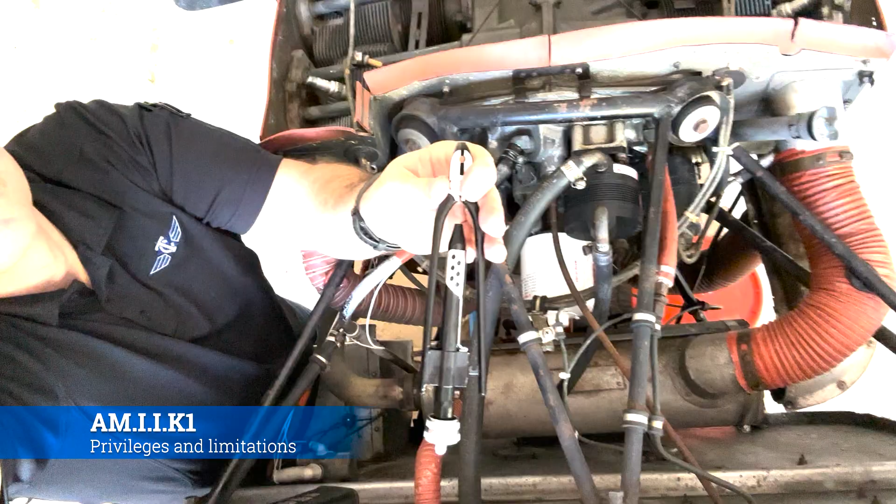Okay, Part 65 covers the certification of airmen to include mechanics. Now, an airframe and power plant breaks down into three actual certifications. One is your general, which allows you to grow into an airframe mechanic or a power plant mechanic, or in our case, an airframe and power plant mechanic.

Now, there's two ways that you can do that. You can do it through practical experience, but it takes several months and it's a long period of time, or you can go to a school like this one, and then you can graduate inside of about a year or so, if you successfully pass the oral and practical and the written test for each one of those: general, airframe, power plant.

Okay, so now if you just have your general, what are you able to do? You're not permitted to perform any sort of major repairs or major alterations to propellers or anything else like that. There's very few that actually have just their general, but most of these guys work at repair stations.

But the thing is, you can go work at a repair station, and so long as you're operating under their certificate, you can get your repairman certificate and just work. There's not a lot of money in doing that, but it is a way to gain experience if you didn't have your A&P.

Okay, so what about airframe and power plant? So once you have your airframe, you're authorized to perform 100-hour inspections and servicing on airframes. That means anything that's attached to that airplane minus the engine. Once you have your power plant, then you can do the 100-hour on the engine.

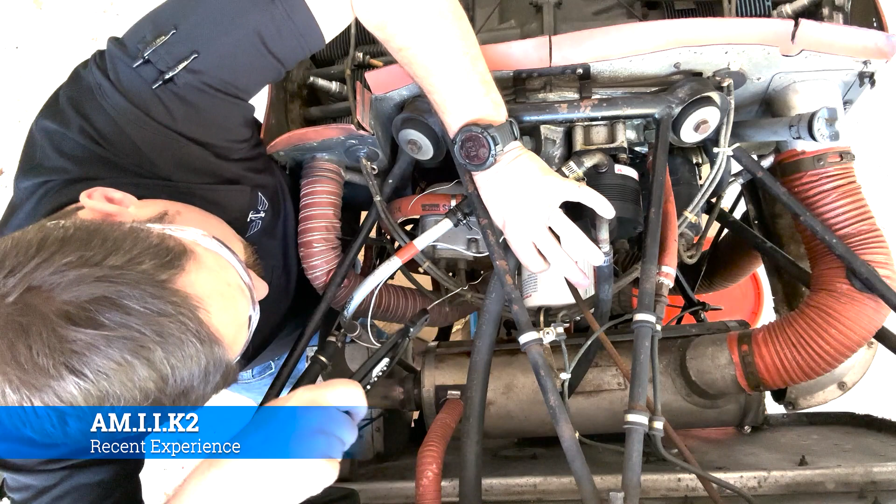Okay, so Part 65 states that the mechanic, before exercising their privileges, has to work for at least 6 months of the preceding 24 months in one of three capacities. One, they served as a mechanic; technically supervised other mechanics; or served in an executive capacity over the maintenance and alteration of aircraft.

So basically, you've got to be a mechanic, a team lead, or a manager of some variety in order to exercise the privileges of your certificate. Now, you'll never lose that certificate. You just won't be able to sign anything off for 6 months if you start and stop all over again.

Now, on that, if you were to lose your recency, there's a dozen different ways that you can get back again. You just have to do one of those ways for 6 months to regain that recent experience.

This could be just going to work at a repair station, getting another job as a mechanic and then not signing anything off, volunteering, any number of things where someone will just vouch that, hey, look, for 6 months you've been doing X, Y, or Z as a mechanic. Once you're there, then you can turn around and sign things off again.

So now, as a mechanic, you're going to be using a lot of technical data to do your job.

Now, that's going to come from a variety of different places, but one of them is going to be the manufacturer through their maintenance manuals, or their wiring diagrams, or their parts catalog, or any number of other types of data that they will produce and give to you. Let's talk about all those different types of manuals and what they mean.

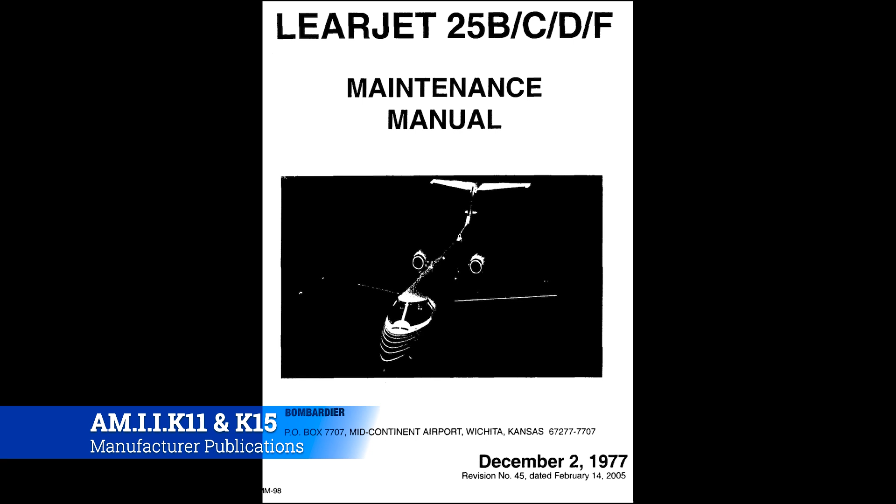You would get into the CMM and you would start troubleshooting and repair or replace that individual item. You could have an overhaul manual for your power plant. If you're a helicopter transmission dude, you could be doing that. You could also work in a place that specializes in overhauls, and you will use the overhaul manual almost exclusively because you'll never see the aircraft. You'll simply get a box, and inside the box is an engine.

Another one, we'll talk about the structural repair manual. That contains manufacturer information on specific instructions for repairing primary and secondary structures. So, doing massive rework on the airplane structure itself. Or an IPC, an illustrated parts catalog. That's something that we're going to use on a regular basis to get part numbers and check the effectivity of parts, so on and so forth.

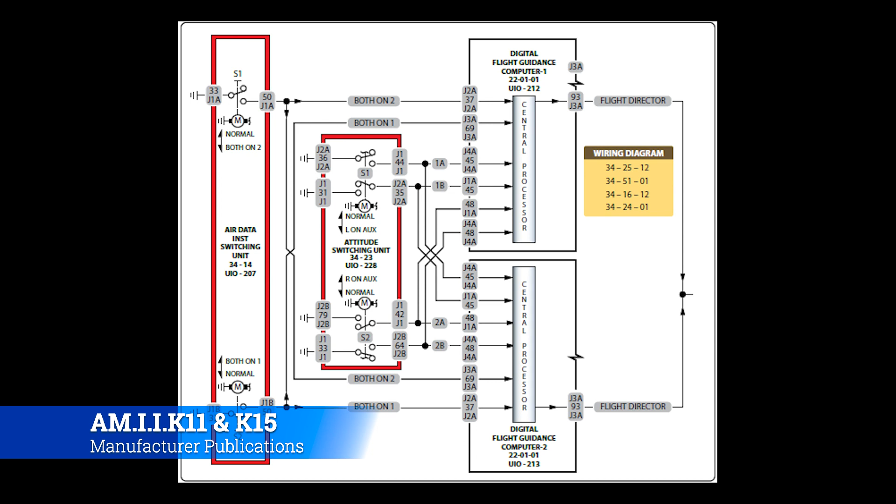The wiring diagram manual. When I was in the Army, they called these fold-outs because they were so big. You would open up this actual paper book. It was the one that we didn't have a PDF of, so we just had an old paper fold-out. We would open up the book and literally fold out these massive sheets, and then use those for troubleshooting any sort of electrical fault. So that's your basic aircraft maintenance manuals that you need to know about.

A special manufacturer publication that will come out, especially if you are into private jets, are service bulletins. Service bulletins, sometimes called service instructions, are several different types of publications issued by either airframe, engine, or component manufacturers. These service bulletins will come out and say, hey, we need you guys to do X, Y, or Z because we found a safety condition, or some sort of non-conformity, or we found that this guy in the factory was asleep on the job, and we produced a bunch of parts that shouldn't have been produced, so we need you to change these things out. Now, all these service bulletins will have estimated man hours to remove and replace these components.

So if you're a private jet guy, you're going to have owners and pilots. They'll say, well, how much is this going to cost me? How long is the jet going to be down? And these service bulletins give you an idea of how to have that conversation. You can say, well, this says it takes 10 hours, so it's going to cost you $3,000 or whatever it's going to be, and it's also going to be out for a day or whatever. But that is a service bulletin.

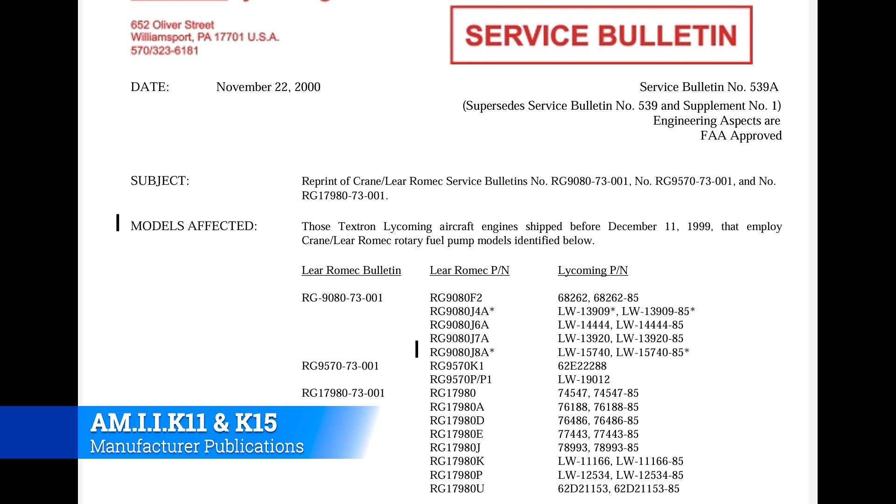So, kind of related to the service bulletin, but not coming from the manufacturer itself, is the FAA's aviation maintenance alerts. They provide a common communication channel through which the aviation community can economically interchange service experience and cooperate to improve aeronautical product durability, reliability, and safety. Essentially, it's a fancy way to say, hey, look, I found this on my plane. I'm going to let the FAA know, and the FAA lets everybody else know.

It's not quite to the level of an airworthiness directive because it's not a common thing that we see on a regular basis to the point we need to do a massive change. It's just kind of a heads up to be looking for these types of things.

If you say, hey, look, I found this piece was melted on my airplane, you could simply let the FAA know. They put it in the bulletin, they push it out, and then everyone else knows that whenever we're doing work on that type of airplane, we need to look at that piece to see if it's melted. Maybe there's a trend here. Maybe it's just a one-off of that one guy, but it doesn't hurt to simply be talking to one another.

The last bit on this section is the minimum equipment list, or the MEL. You'll hear a lot of Part 121 guys or heavy commercial guys say, "Well, we just MEL'd it, or we deferred it." What they're referring to is that in order for the airplane to be legal to fly, there is a minimum equipment list, and that's what MEL stands for. As long as the airplane has what's on its minimum equipment list, then it's good to fly. You can defer whatever fault is showing up for heavier maintenance later on down the road.

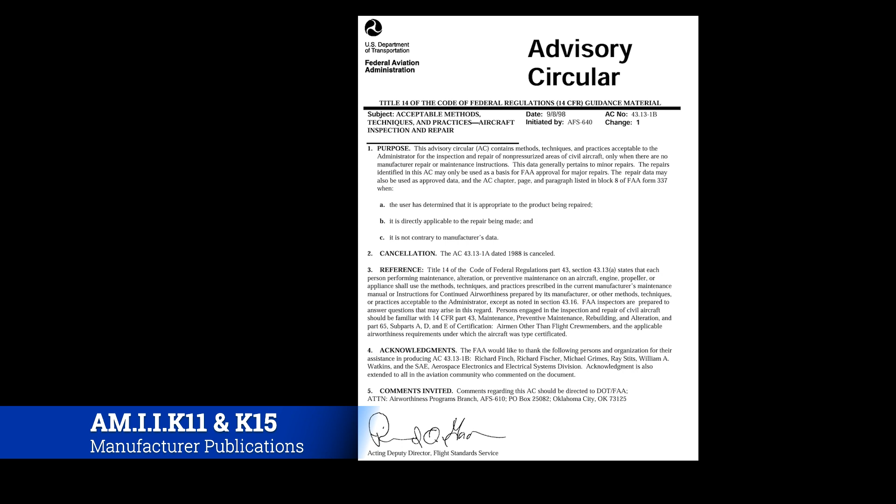But just know AC-43, and there are some others, but the main thing that you need to take away is what is approved and what is acceptable to the administrator. You can't just be doing the shade tree mechanic thing and beating to the tune of your own drum. You have to work to some sort of documentation, some sort of plan for it to be legal and professional aircraft work.

Now, in those maintenance manuals and the service bulletins and that documentation we were talking about, there are all kinds of fairly standard cautions, warnings, and notes, and every single one of them means something. So let's talk about all those standardized blocks that you'll find in a maintenance manual, a service bulletin, or a maintenance alert, and what they mean. We're going to look at notes, cautions, and warnings.

But first, I want you to see this page. Notice that this is some really basic stuff. It's how to use the maintenance manual, what the notes, cautions, and warnings are, and serialization. Notice in the bottom right-hand corner, this is page 2. Almost every maintenance manual you ever work on will have these introductory pages up front, front matter. If you're new to the plane or new to that manual, it is very good to start by brushing up on the differences inside of this manual.

If you go back to our human factors class, we talked about the SHELL model. One of the things the SHELL model looks for is confusion in the maintenance manuals and maintenance practices. Is there some kind of weird, quote, software issue where they made the maintenance manual so confusing that people just can't follow it? So it's always good to review this.

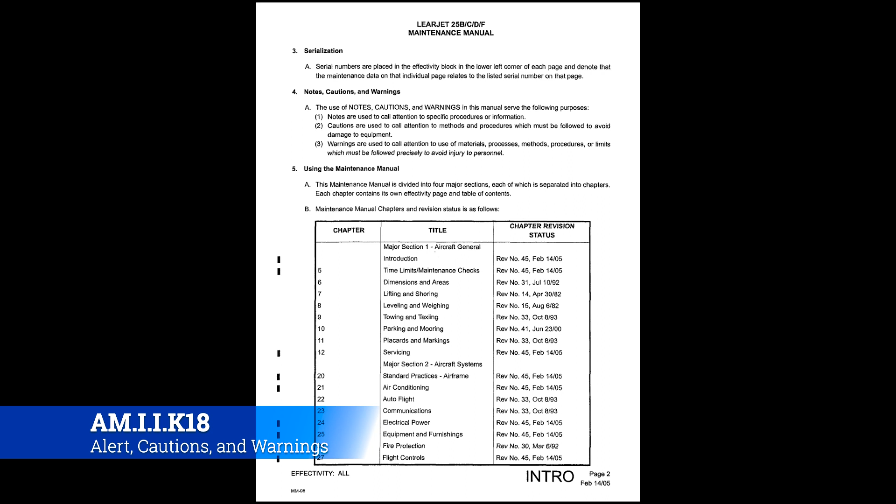Now, this is the Lear 25's manual that we're going to be using throughout the duration of this course. It's going to be our trainer. But anywhere you go, one of the first things you should do, and it should be part of their program as you come on, they'll say, hey, look, these are the differences in our manuals. Now, notes, cautions, and warnings are fairly standard. They don't change that much, but they could. So let's go over what notes, cautions, and warnings are per the Lear manual, and then we'll go on from there.

So first off, notes. Notes are used to call attention to specific procedures or information. Most of the time, whenever you see a note in a maintenance manual, it's because there's something that may not be painfully obvious to the person working on it or reading through the manual. For instance, note, make sure the grease gets into this place, or make sure you have this circuit breaker pulled, or make sure nobody else is working on these things because this system will talk to that system and mess things up, or you might get a false reading, or your inspection will be invalid.

The notes are really good to pay attention to before you actually get working, which is a good practice, and we're going to hammer this into you. Sit down and read through all of the tasks first, and once you have a good idea of what's going on, there won't be any surprises. Or a note might say, hey, if you've done steps 1, 2, and 3, don't worry about steps 4, 5, and 6, just go straight to 7. Otherwise you work through 1 through 6, get to 7, and realize you didn't have to do that work, because that happens.

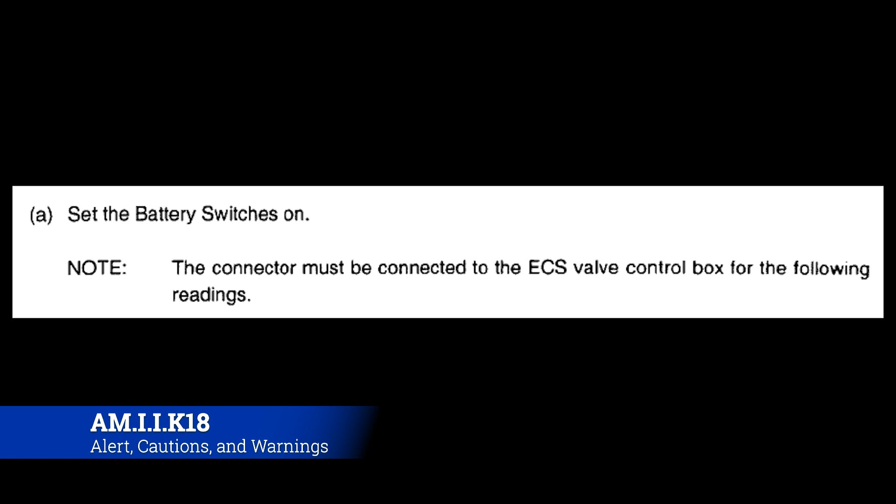So that is a note. Now, cautions are used to call attention to methods and procedures which must be followed to avoid damage to equipment. So this is pretty standard. Caution for the airplane, warnings for people. So essentially what a caution is doing is saying, hey, look, don't swing the gear if you have X, Y, or Z locked out or whatever.

A good example of this, even though this may be a warning, I don't know how it reads in the AMM for a 787, but essentially there is a way to close the nose gear up on the 787 whenever it's down if there's not a certain pin in. And so you could have a caution that says, hey, look, don't do these things, or don't put it in air mode if you don't have this pin in, because these things could happen. The nose gear could close up and you go slam right down onto the floor.

That actually happened whenever I was at ATS. I was up at Everett. This happened out at Moses Lake. But essentially, a guy got on, went to do some avionics troubleshooting. He put the plane in air mode. They didn't have the pin in. Down the plane went. If I'm remembering that correctly, it was several years ago. But essentially, that could be an example of a caution. Hey, look, if you do these things, you could damage the airplane.

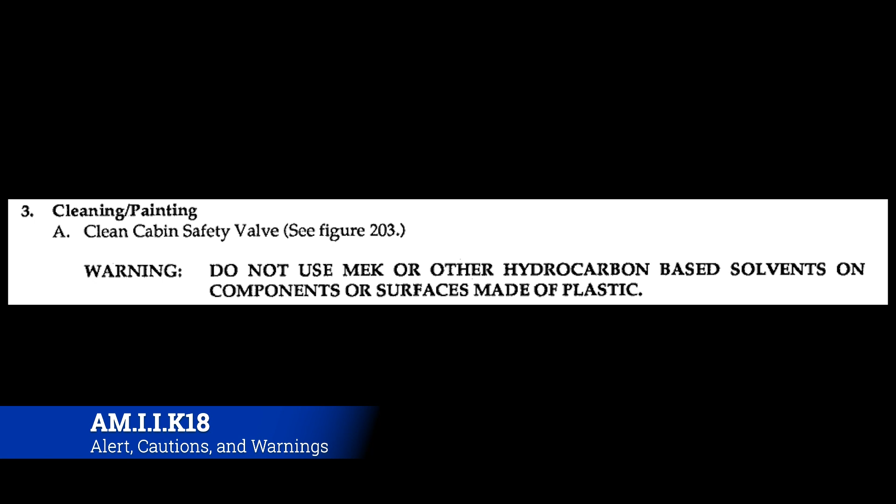There's also times where you could get seriously hurt like, don't energize this circuit if you're doing X, Y, or Z, because it's going to cause electricity to flow in a way that's going to get you shocked. There's all kinds of these warnings in there, and these are the ones that you need to really pay attention to, because you only have one life, you only have two eyes, and you only have 10 fingers. That means you have a limited amount of mistakes that you can make, depending on the severity of that mistake. And you need to make sure that you're not doing something that's going to eat up one of your 9 lives. So those are notes, cautions, and warnings.

Now, in the past, we've talked about effectivity and how different parts will have different effectivity codes that correspond with the airplane serial numbers. In some situations, there will be an actual effectivity code, and this is effective for line number point A to point B, or whatever it is. Let's get a little bit more familiar with effectivity and how it applies to our parts catalog. Okay, so we talked about effectivity codes a little bit earlier in other videos, but let's give it an overview and we'll dive into them again.

So as aircraft are produced, different parts will get used. Sometimes this is a design change, sometimes it's a supplier change. If you build an engine that says, hey, look, this is where all of our exciter boxes are going to come from, like Brandon Sanders exciterbox.com, and then all of a sudden the world realizes that I don't know how to build exciter boxes, and they fire me, and I go bankrupt. Well, if you still want to deliver jets, you're going to find a new exciter box place. So you go to actualexciterbox.com and you start ordering from them.

Well, let's say there's an issue with your engine and you have one of the Brandon Sanders era exciter boxes. Then it's going to say, hey, look, this part number isn't good anymore. You need a new part number from the actual exciter box company. And so that means that my part is only going to be effective on certain serial numbers of the jet, and then whenever it goes out, it needs to get superseded by the new exciter box number.

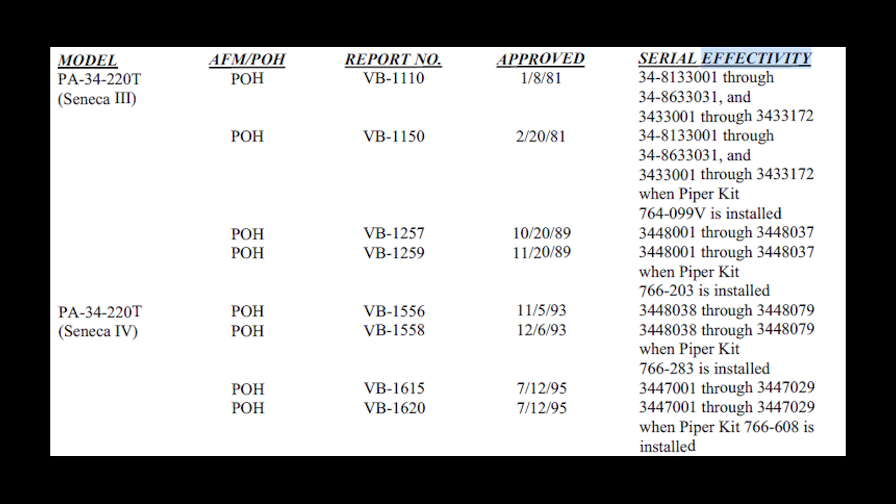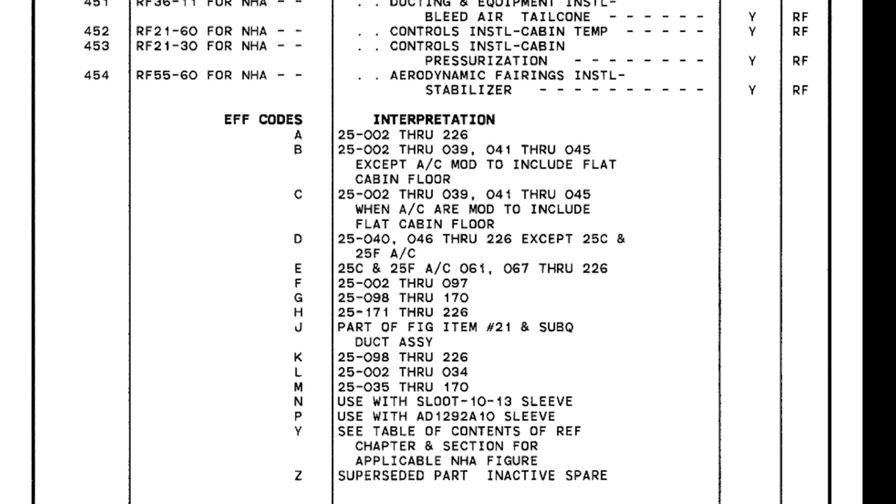Okay, so here's our service bulletin again. Notice that it looks very, very different, but also notice that effectivity doesn't go just for parts. It can go for a lot of things. In this case, it's technical data. So this technical data, this service bulletin, is effective for those part numbers or those serial numbers that you see listed there on the bottom of the page.

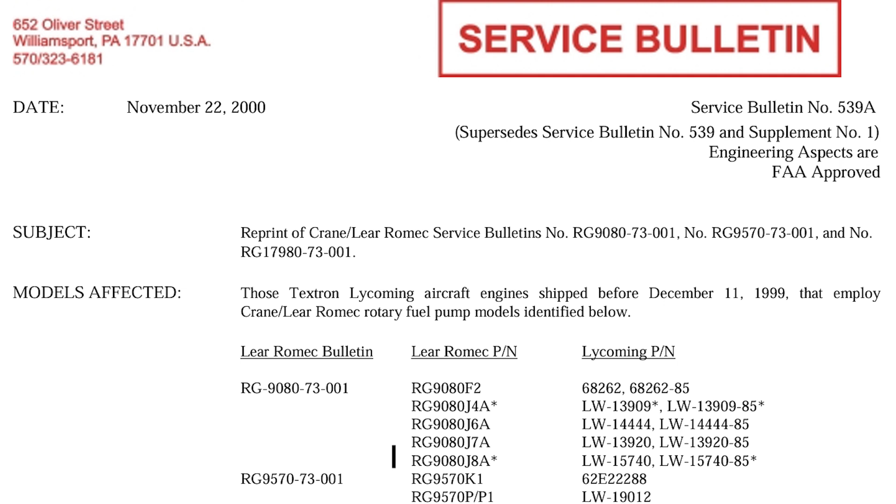The principle is still the same. It's still like this data, just like the part in the IPC that we just looked at. This data is used for these serial numbers, and so if you're using this service bulletin on a serial number that doesn't fall within those ranges, well then you're doing maintenance not by the book, and you shouldn't be doing it. But the big takeaway here is to know that effectivity goes far beyond just parts. It also goes into a wide array of things. It's a system that gets used throughout aviation.

Okay, here's another example of effectivity being used outside of a parts manual. This is the front matter that we just looked at on cautions, notes, and warnings. Notice on the bottom left hand side how it says effectivity colon all. It means that this is how Lear as a company does their maintenance manuals. Cautions always mean this, warnings always mean that, notes mean this, and so it's effective on all the Lear 25s that they produce. And I'd be willing to bet that it means that for all of the aircraft they've ever produced. But yeah, so that is effectivity.

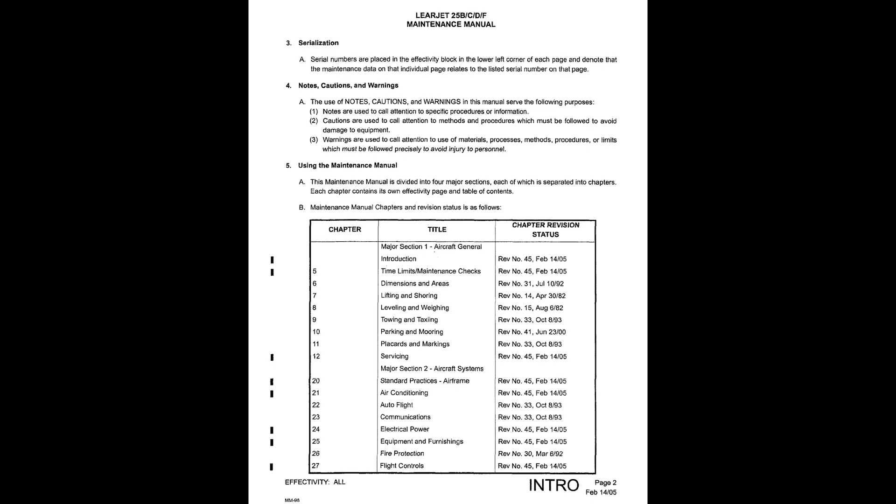Let's talk about maintenance programs and what the manufacturer requirements are for different airplanes and different maintenance programs, and how that applies to our job and how we maintain our compliance with those maintenance programs. Okay, so the two basic inspections that are going to have to happen per Part 91 are the 100-hour and the annual.

Now, if you have a privately owned aircraft, you only have to do an annual legally. But you'll be doing the 100-hour lubrication per the maintenance manual whenever you're doing that annual. It's not really that big of a deal, because everything that you're going to access during the 100-hour, you're also going to access during the annual, generally speaking.

Now, if you're operating an aircraft for commercial purposes or for flight training, then you have to comply with the 100-hour rule. So that means if you were to have a privately owned aircraft and you fly 1,000 hours, you do one inspection a year. It's an annual, and then you're going to be doing the 100-hour servicing per the maintenance manual either way. But that's all you're legally required to do for a privately owned aircraft.

Now, if you have a commercially owned aircraft and you fly that 1,000 hours in a year, you actually have 11 inspections you have to do. You have to do a 100-hour every 100 hours, and you have to do the annual. Typically, the annual and the 100-hour happen at the same time, so you don't have to worry about that. But those are the basic two inspections that every airplane will have to comply with in one way, shape, form, or fashion. Once you get to the higher echelons of aviation, they may not call them that, but that's what's happening.

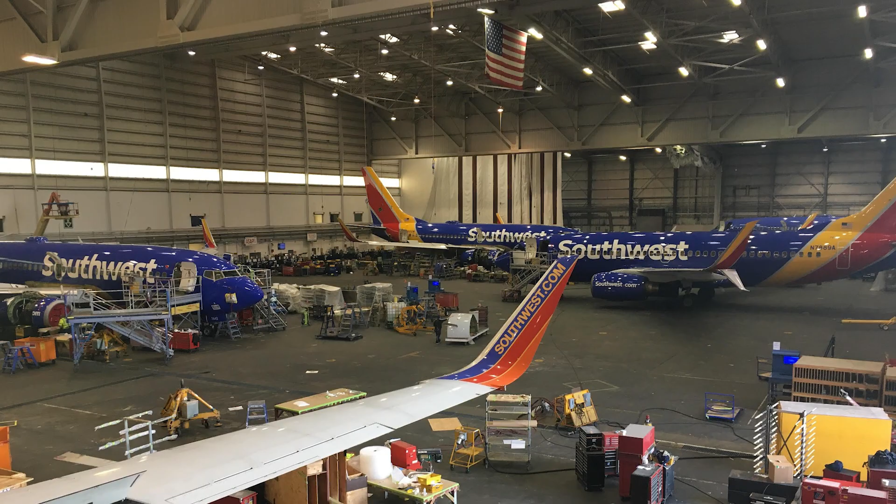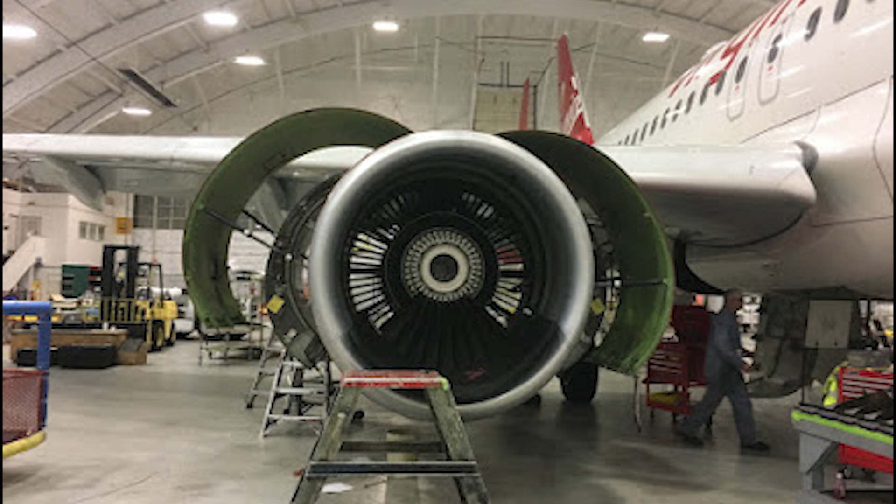Okay, the other type that you can get into is called continuous inspections. They're similar to progressive inspection programs, but they apply to large turbine-powered aircraft, and they're a little bit more complicated. They will often be referred to as checks, and you'll hear airliners talk about A checks, B checks, C checks, so on and so forth. These are really intense checks. That is another type of progressive phase inspection, but they're broken down in the op spec of the air carrier that's operating them, rather than just off the maintenance manual.

Another one that we should probably talk about while we're here is the altimeter and transponder inspections. Per Part 43, you have to inspect certain things on certain intervals, one of them being altimeter and transponders that happen every 24 months. So typically this will be aligned with the annual of a small GA airplane. And so every other annual, you have to go get a transponder check and an altimeter check, and you'll go to a certified repair station. They'll hook up a pitot-static kit to your plane, make sure that everything is reading right, make whatever adjustments are necessary.

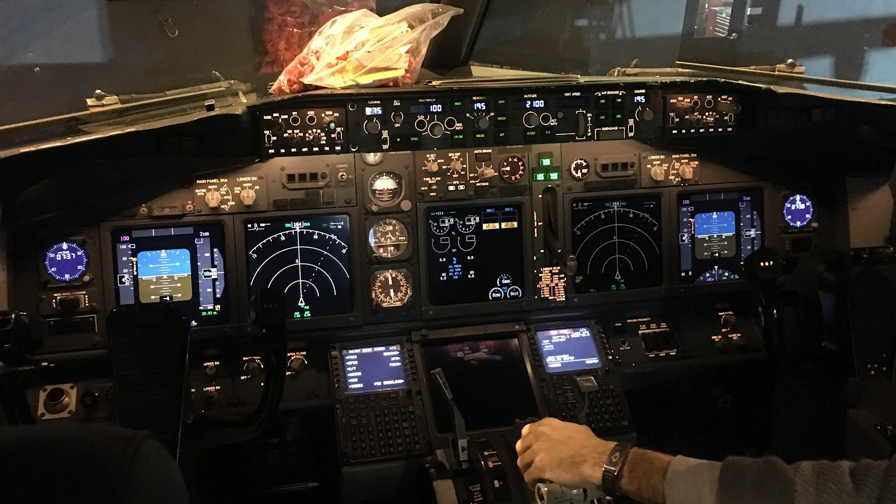Now, this is really important because if you're reading the wrong altitude and you're transmitting on your transponder or through ADS-B the wrong altitude, then you're a serious hazard to yourself and everybody else flying around in the air, because everybody else is expecting you to be where you're reporting that you are. And so this really needs a lot of attention to make sure that it's done correctly. And we're going to show you how to do those checks once we get to the advanced avionics portion of the course. But those inspections happen every 24 months, and you can look forward to learning how to do them.

There's a dozen ways to skin a cat, especially in aircraft maintenance. Just because a certain technique can be used doesn't necessarily mean it's the right way to employ that technique or the right time. So let's talk about compliance with manufacturer-approved methods and techniques.

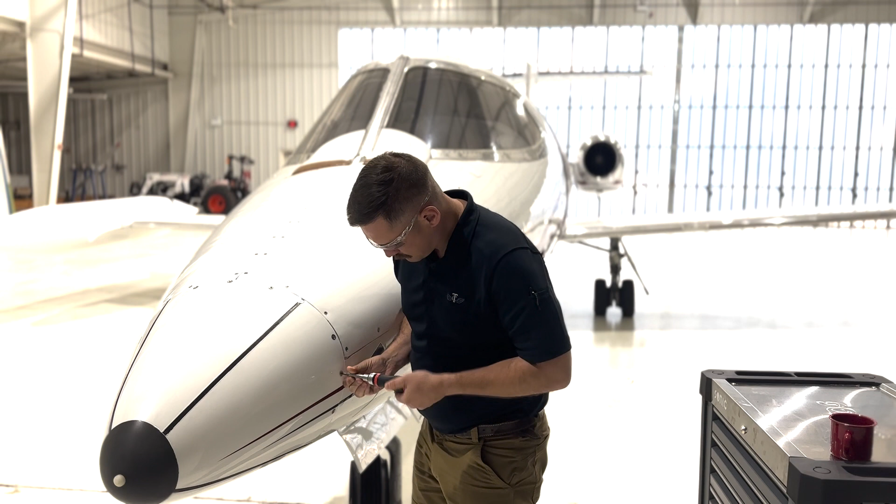Now, regardless of what you work on or where you work, you will never do work that is not annotated or dictated from some sort of maintenance manual or guiding document. Even if you're trying to do something that's totally new, that no one's ever documented before, you're still going to have to work to either approved or acceptable data, which means that you would be writing letters to the FAA and being authorized certain types of work. This is where aviation maintenance meets engineering.

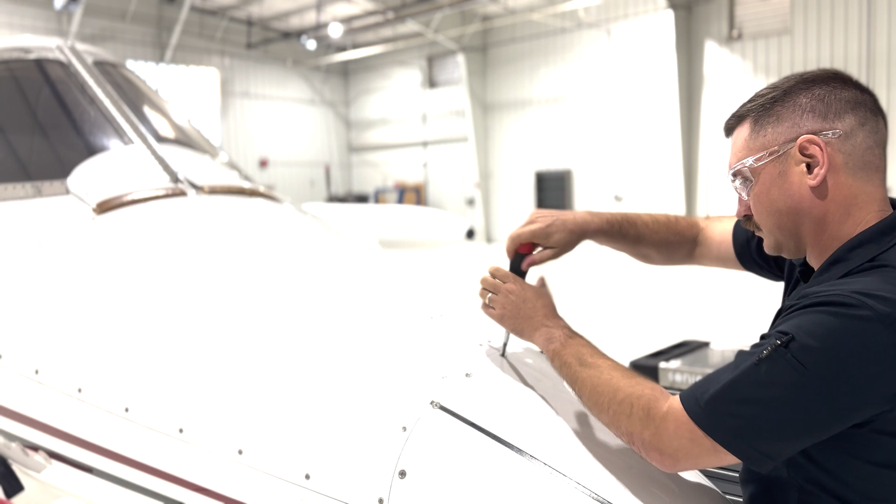You can't just go and do whatever. You have to be authorized by something, and then that person that's authorizing you has to have a reason to authorize you. They can't just say, oh well, that sounds like a good idea. No, they're going to do tons of research and tons of work to try to understand what it is that you are attempting to do. And all that type of manufacturer information gets researched, analyzed, and then annotated in their maintenance manual, so that way we are working to well thought out plans and information.

So no matter what you do, always work to the book. Follow the AMM task or whatever you're following to the letter, and then whenever you get to the point where you're going to sign it off in the logbook, you're going to say I followed it per, and then state the task. 23-22-01 or whatever the task number is, or say I did this per the maintenance manual, or this STC, or this AD, or whatever the guiding document is.

You're always doing by the book maintenance. And you'll hear me say that over and over again. By the book maintenance. The jet is expensive. It comes with directions. Follow the directions. Do by the book maintenance. The manufacturer maintenance manual is only one source of information that we'll use as mechanics. What are some other FAA databases that we're going to be pulling from to get the answers we need? Okay, so last part of this section, let's talk about some databases and resources that are available.

And we've already talked about these at length, so we're just going to go over them one more time. So you have all the manufacturer things like your AMM, your wiring diagram, structural maintenance manual, IPCs, all that type of stuff. You get to the more complex jets, you have FIMs like fault isolation manuals and component manuals and overhaul manuals and things like that. Now, the FAA actually produces a lot of these types of databases for you to draw from, like the TCDS, type certificate data sheets, AC 43. AC 43 is actually broken down into several different advisory circulars. ADs are another one that will tell you exactly how to work.

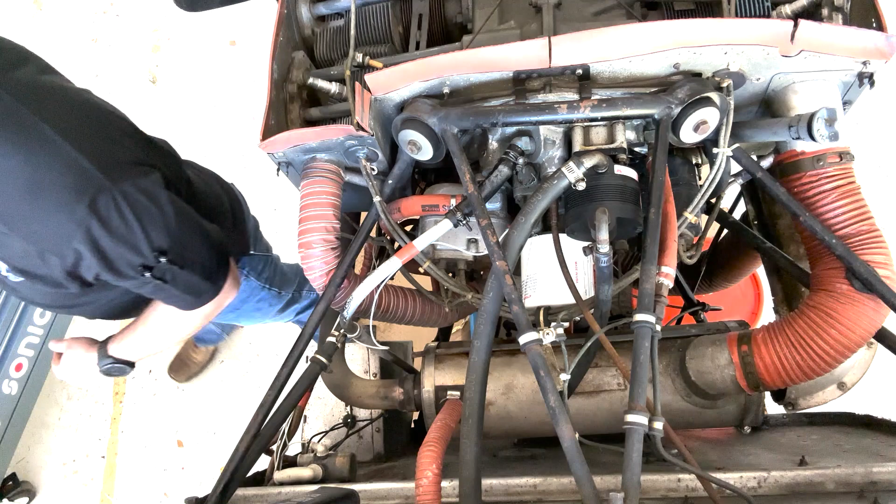And if worst comes to worst, if you just cannot figure it out and you can't find anything to guide you, pick up the phone and call the Flight Standards District Office and ask to speak to one of their maintenance-oriented inspectors. You may have something that's wholly new, wholly different that no one's ever seen. I doubt it, because aviation's been around for a long time and we've been documenting it a long time. But you never know. There's always emergence in any complex system, so there very well may be something weird that you haven't found that needs to alert the rest of us.

So pay attention to what all the FAA puts out there. They do a lot of good work to try to keep the flying public safe. Learn how to implement those service bulletins and the maintenance alerts that come out to refine the art of being a good aircraft mechanic, which is a craft at the end of the day. You will never learn everything there is to learn, and you'll just keep on learning new ways to learn different things, and that's what makes a good aircraft maintenance technician over one that's poor. One that's poor just thinks they know everything and they just kind of do it however. The one that's humble and continually tries to refine the process and the art will always be the better mechanic.